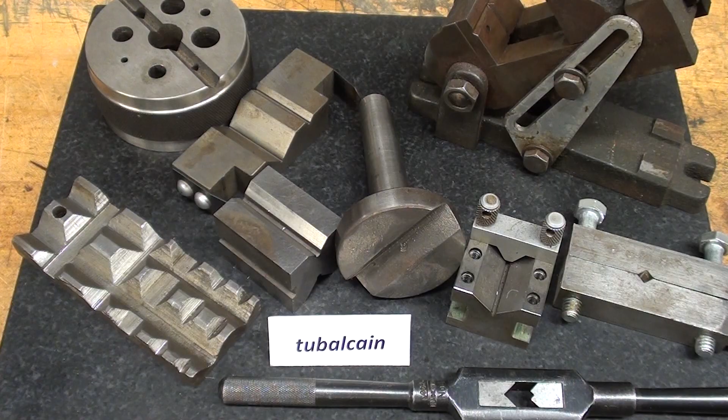Howdy, it's Tubalcain once again, and this is a two-part video dealing with how to make a 90-degree notch in your workpiece. Now, quite often you need to do this, and there are many different ways of doing it, but looking at some of the samples I have laid out here, you can see that you need to do this if you're doing repair jobs or making certain kinds of projects.

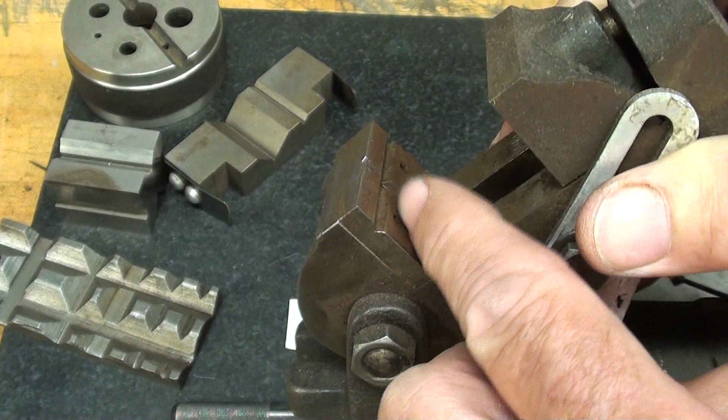So there's a 90-degree V in a tap wrench and in a lathe dog. There's all kinds of V blocks that require it. Crotch center, and you're going to see it quite often in drill press vises where they have one of the jaws with 90-degree V used to hold round stock.

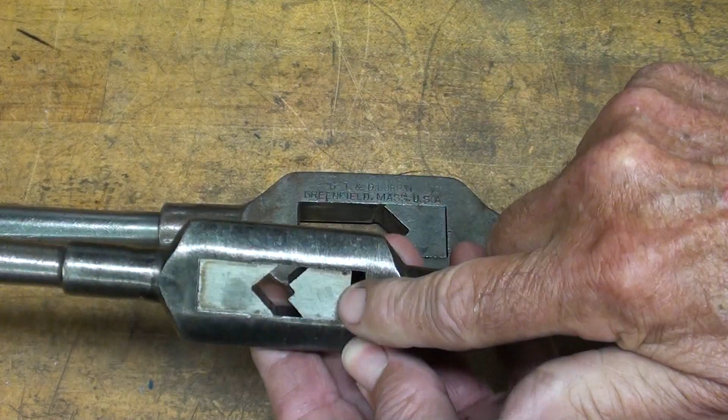What prompted me to make this video and this demonstration is that in the following video I'm going to show you how to make the movable jaw, which is missing in this Greenfield tap wrench, and another one of the models will look like this, and that's really what I'm modeling it after, and I'll be making this movable jaw out of tool steel. So be sure and watch that video, and there's several different ways of approaching that.

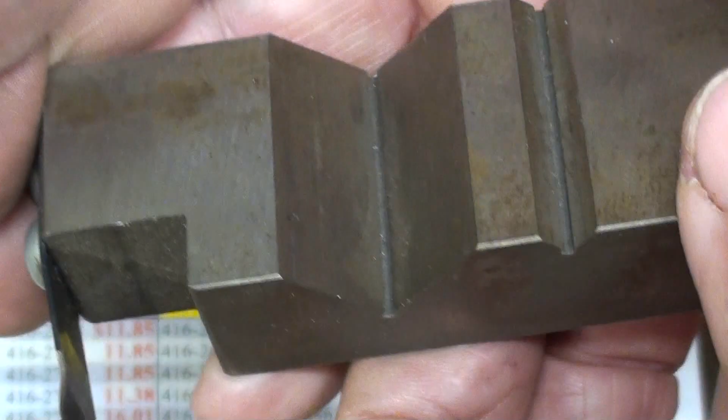This 90-degree notch is very easy to make if you have the right cutting tools. For instance, here's a drill mill, and that's easy to center. The problem is centering it within the work, so that's what I want to show you how to do. And these are available in 60-degree and 90-degree, but they're rather expensive when you get into the larger size that you might need. So a 1/2 is about $40 or $50, and when you get into a 3/4 wide, it's about $150.

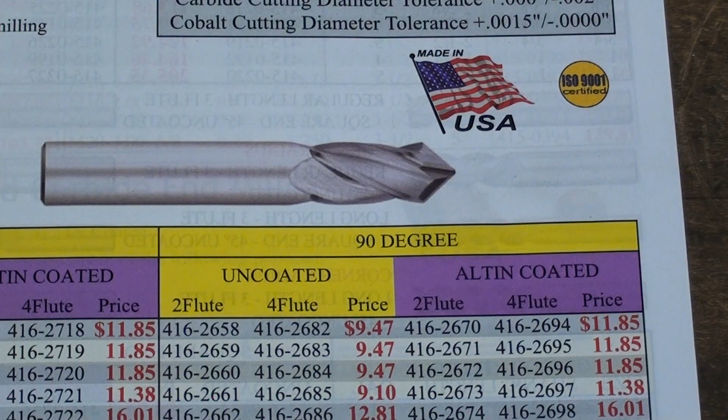And if you have a horizontal mill, you're probably going to use a double angle cutter as shown in this old Brown & Sharpe catalog, and those were available in, as you can see, different degrees here, but I'm interested in the 90, and this goes on the arbor of a horizontal milling machine, and it only costs $7. Oh, that's right, that's from 1938. That's about a $250 cutter.

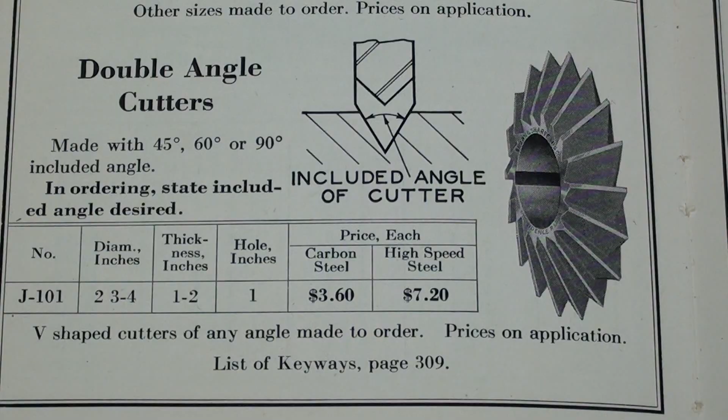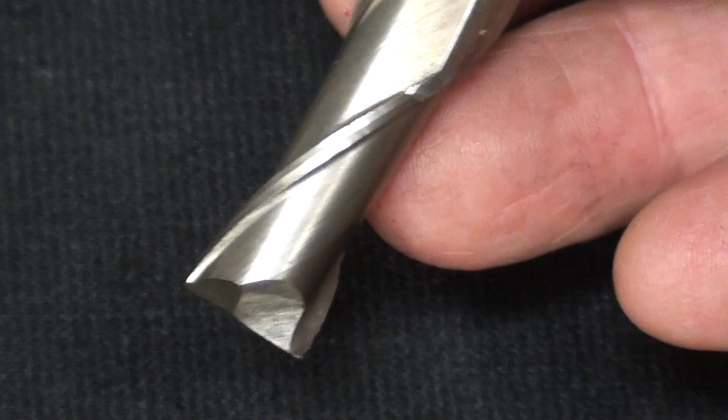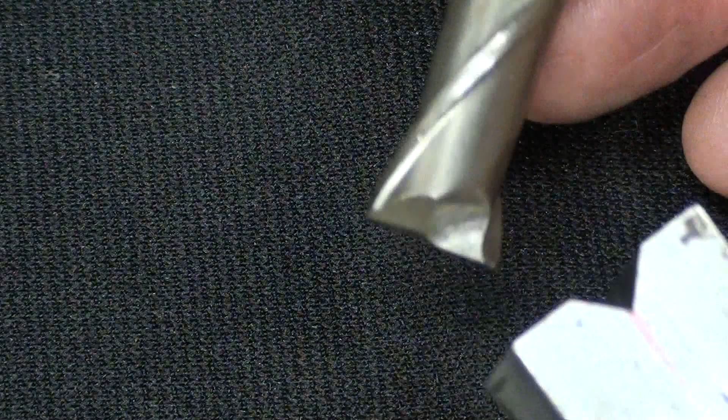But the problem we're solving here in this video is how to make that V-notch 90 degrees with an end mill, because everyone has end mills. Everyone that has a milling machine has end mills. They're cheap, easy to find, and that's what we want to use. Okay, and that's going to give you 90 degrees.

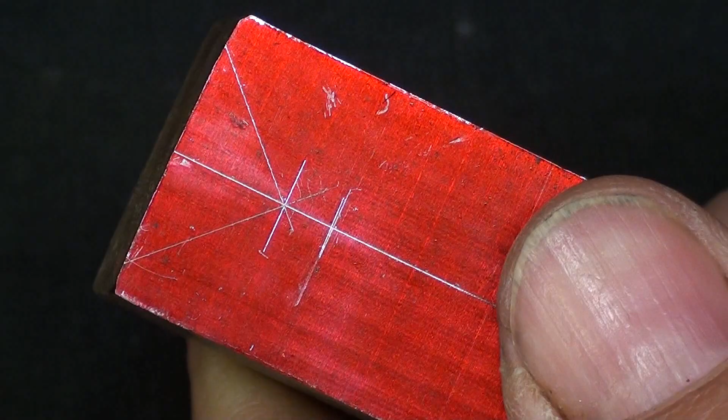Most of you have probably been doing it by the method where you just do an accurate layout and mill to the layout lines, and that probably is fairly accurate, and later on I'm going to show you how to measure that to see if you're truly on the center. Sometimes it doesn't matter if you're exactly in the middle. It just doesn't matter, but other times you want it right on spot. So let's talk about using an end mill and setting it up in the vertical mill. Let's see how to do that and to find the center.

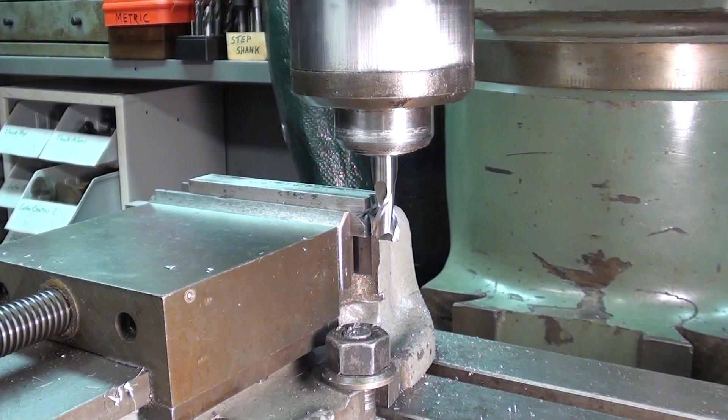Here I am over at the milling machine, and it's very important that when you're doing this method that the end of the work be perfectly square. So I'm going to mill it off square. And this could just as well be done in a 4-jaw chuck. Matter of fact, it probably would be better. Okay, I'll remove the burrs. This is 3/4 inch square cold roll steel, and it's just a sample piece.

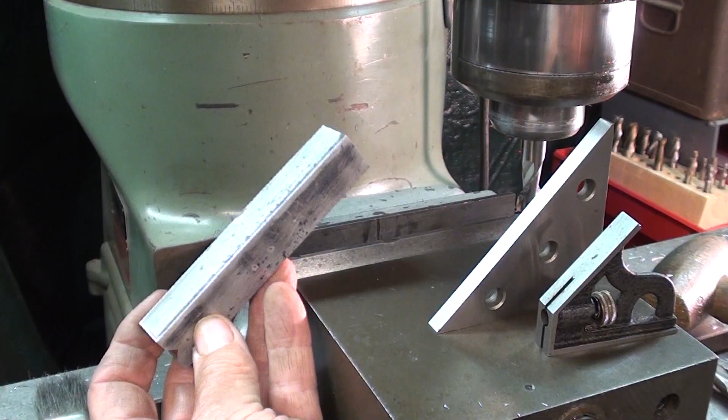Now this is how to set the work up, and this is again 3/4 inch square, and it's only 4 or 5 inches long, and you're limited to the length because we have to put the work into the vise at a 45-degree angle. If it's too long, the bottom is going to strike the table, and you don't want it to stick up too high here because you will lack rigidity.

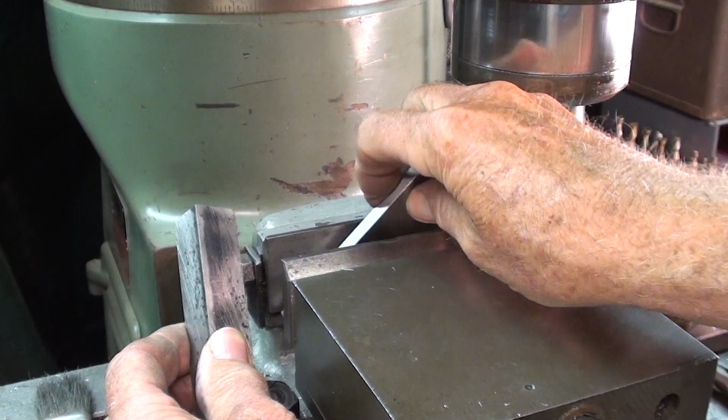So using my 45-degree machinist square, and you can certainly use a combination square or whatever you have, but this one is highly accurate. I just lay it into the vise like that, and I'm going to put just a little pressure on the work, hold it on the square, and I want a minimum amount sticking out, but that's just fine right there.

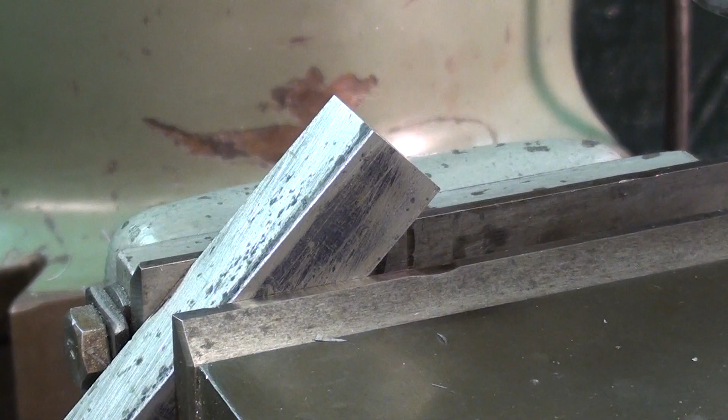I'll tighten the vise, remove the square, and now we have to do just a little bit of calculating. I'm back at the bench to show you how I'm actually going to do this and talk a little bit about the math, and don't let that scare you. We need to touch off. This is held again 45 degrees in the vise. I need to touch off right here and then move in a given amount, but I don't know what that amount is. That's an unknown.

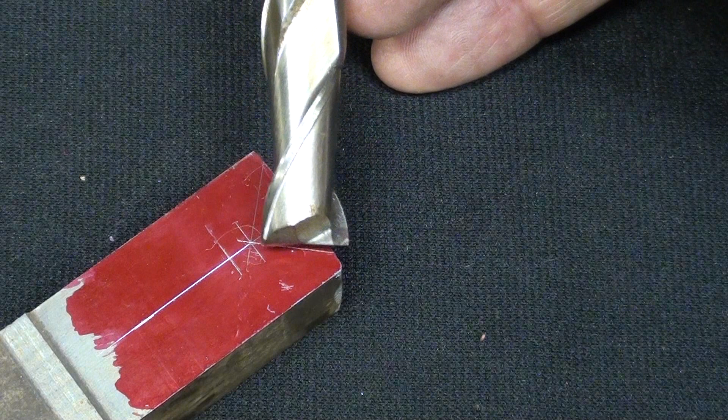Also, I will come down from the top in the z-axis and touch off. It's a matter of going in. And how do I find that? Now this is 1 inch or 7/8 square, but let's pretend that it's the 3/4 inch square for right now.

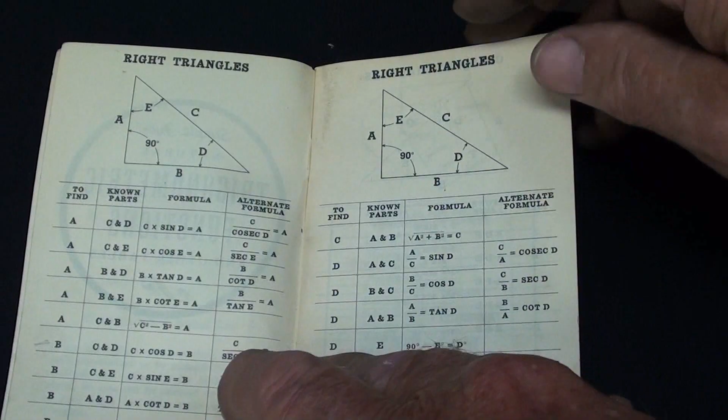Okay, down to the math of it, and I'm not a math teacher, so I hope this makes sense, but using a trig function book, and these are available everywhere, you can find this on the internet easily enough, and this little book is full of formulas and functions. Don't let that scare you. But looking on this page here, remember trigonometry is just the study of triangles. So we have some givens already.

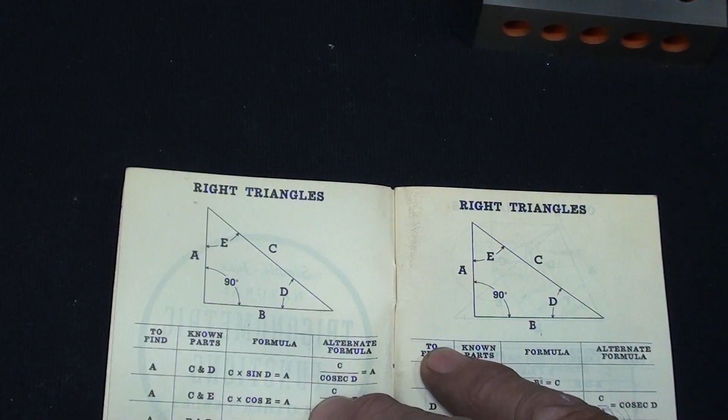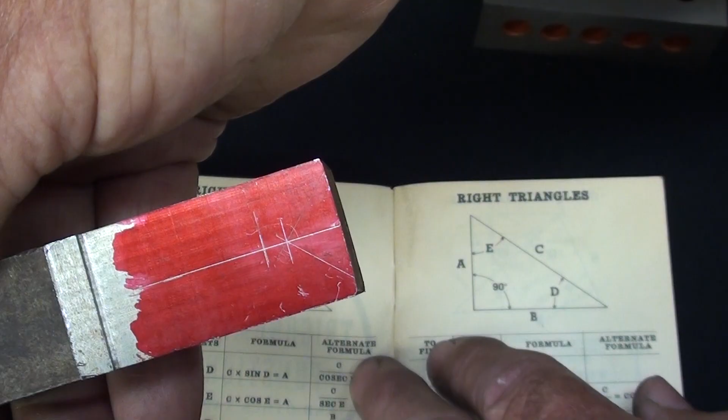We know that the angle is 45 degrees, and we know that this length here of C is 3/4 of an inch. That's 0.750 for this 3/4 inch stock. But in fact, we want to find the middle, so I'm going to change the value of C to 0.375. That's again half of the 3/4. So we have those two, and that will give us B. So we want to find B, which will be the center of the work, right where we have all the crisscrossing there. That's the point that we're trying to find on 3/4 inch stock.

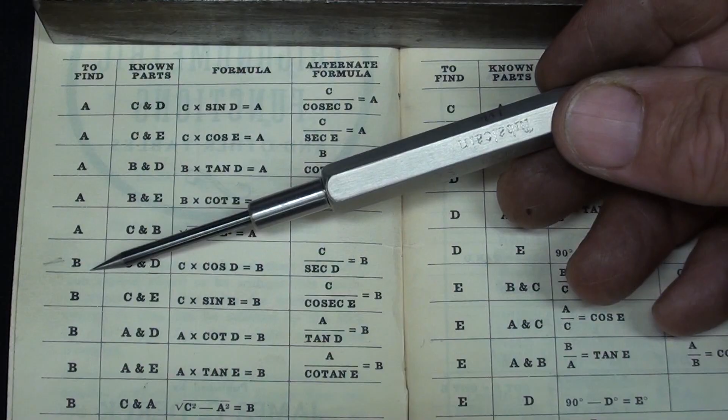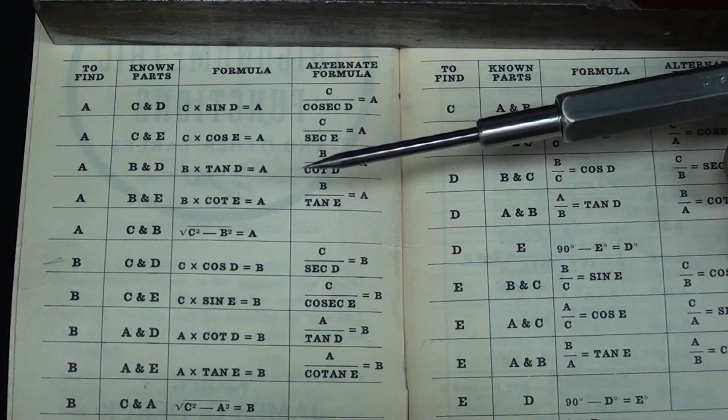All right, let's see what formula we need. Through the process of elimination, I have determined that I want this formula here with a little pencil mark on it, and that will give us the value of B. So the formula is B equals C times cosine of D. Now we already know that C is 0.375, and that we need to find the cosine of D, and that's easy enough to do. That's what I'm going to show you right now, how to find the cosine of 45 degrees. And there's two ways of doing it.

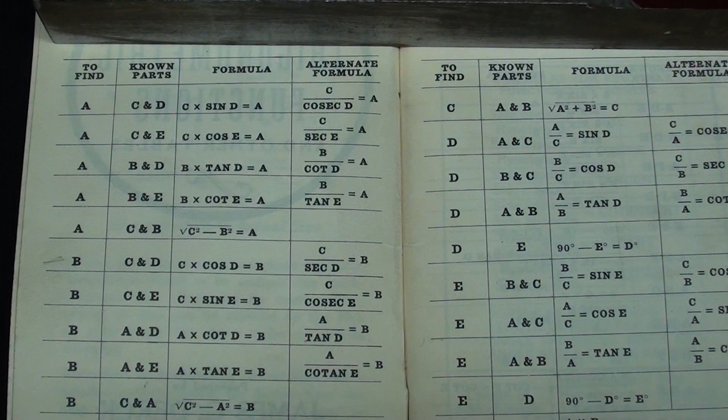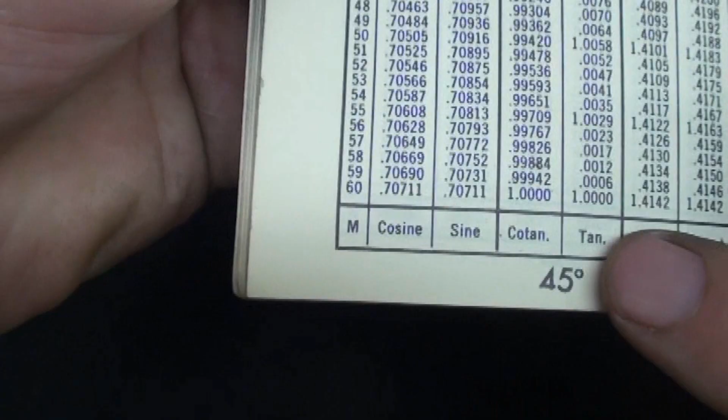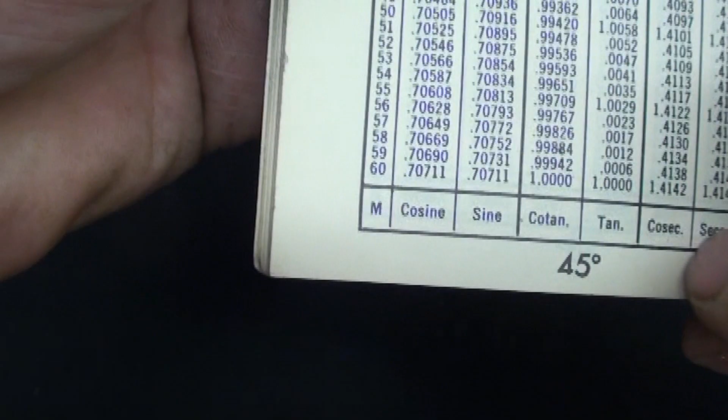If you have trig tables, and there's many pages here, we'll just go toward the back here for 45 degrees, and the cosine right there of 45 is 0.707. And the 60 there is 60 minutes, so forget that. So it's 0.707. Now I'll show you an even easier way.

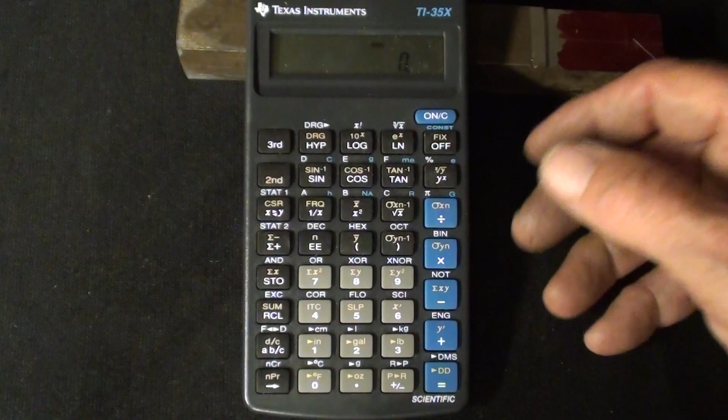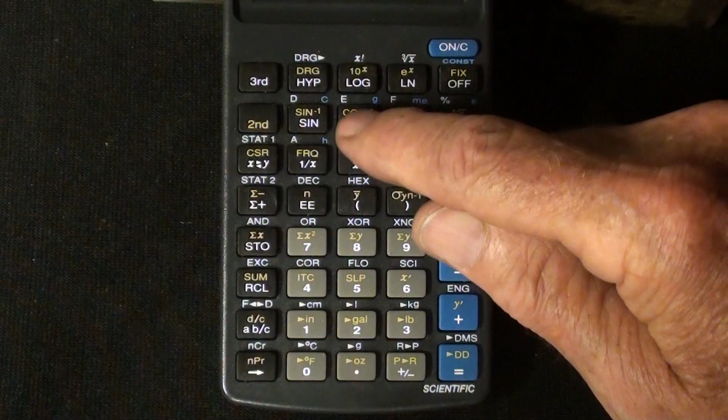Everyone in the world has a scientific calculator. They used to cost hundreds of dollars. Now you can get them at the dollar store, I think. But it's so simple. Notice that on the screen here it says degrees. You ever wondered what that degree was for? So let me just punch in 45. And then I'll just hit the cosine button right here. And that gives me that value. There it is, taken out many more places than we need, but you can see it's still 0.707. Easy enough.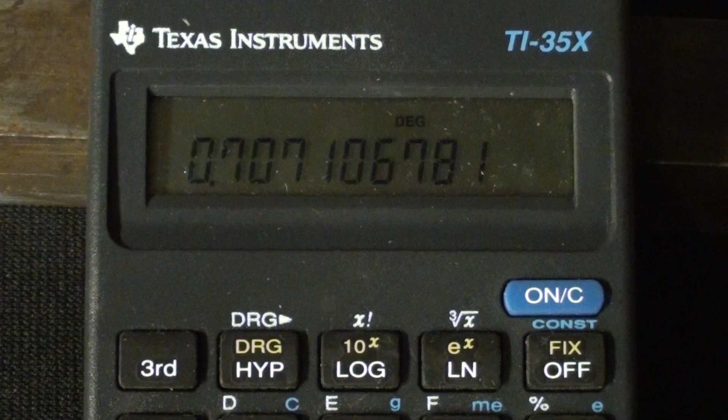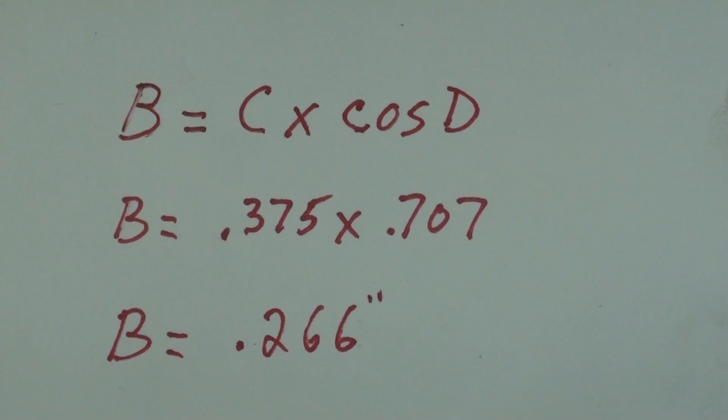Doing the very simple math now for this formula, B equals C times cosine of D, filling in the numbers there. B equals 0.375 times that 0.707 that we just found, and the result there is that B equals 0.266. So that means simply that after I touch off here and find that corner, I'm going to move in 266 thousandths, and the corner of the end mill will be on the center of the work, right out here.

Then we have to proceed to cut by feeding down and over equal amounts until we end up with the right width here, and I'm just going to cut it to approximately 3/8 of an inch. By trigonometry you can get that exact, but how often would you need the width of your V real accurate? So we're just going to do that by by-guess and by-gosh, even though I probably overdid the math there. I hope that wasn't a turn off to you people. So let's go back to the mill.

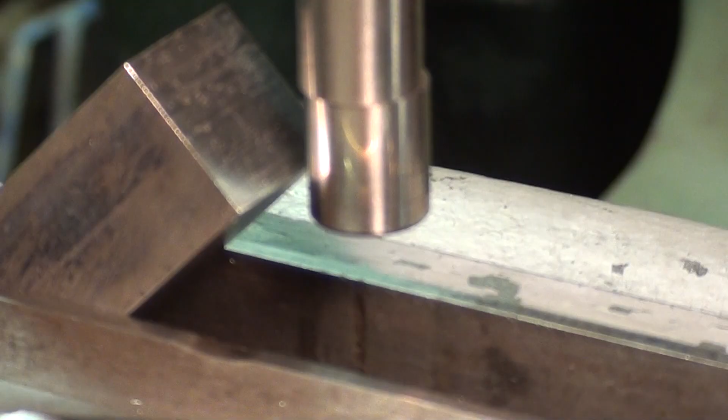Now when I said touch off, I suppose you could use an end mill for that, but I'm using an edge finder, and I use the 1/2 inch diameter edge finder. Since I am using a 1/2 inch end mill, that just makes the tool changing a little bit easier, and I don't need to change the collet.

Now, how accurate is it to use an edge finder on a corner? I actually have never done it before, nor do I know anybody that has, so a lot of what I'm doing here I'm just making up. By experience, I haven't really done something like this very often, if ever, or it was a long time ago. So let's touch off.

Alright, did you see it slide over? So now, looking at the DRO, I'm punching it in to 0 in the x-axis, and I will not be using the y-axis at all.

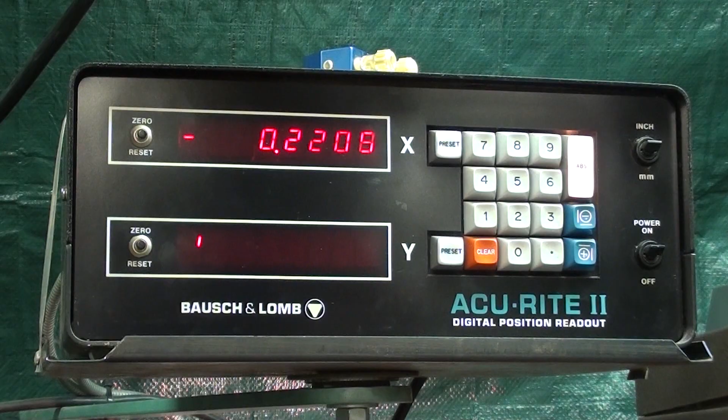By the magic of television, I have removed the edge finder, which is 500 thousandths, and I put the 1/2 inch end mill in there, so I do not need to compensate here because the cutter is on the corner of the work. Then raising that up and looking at this again, I'm moving over the 266 that we talked about. Right there, and if you don't have a DRO, you can dial it in.

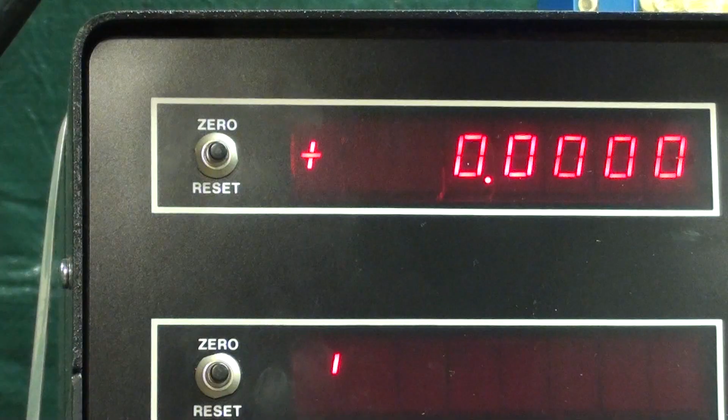There we go. Do you understand now that the end mill is right in the center of the work? All of that math was for that purpose. And since I'm now in the center of the work, I'm going to zero this out. And I can always come back to that when I need to.

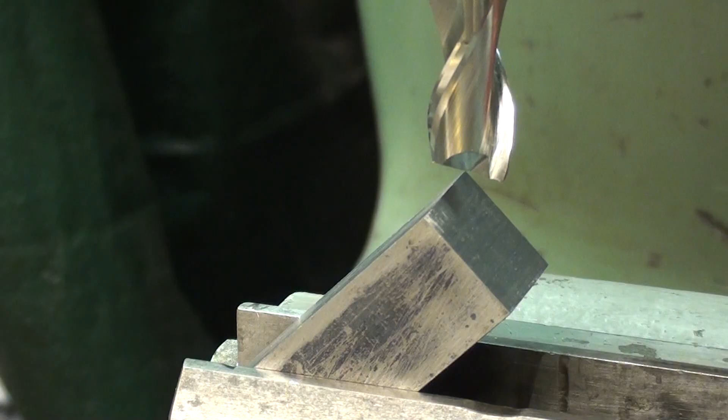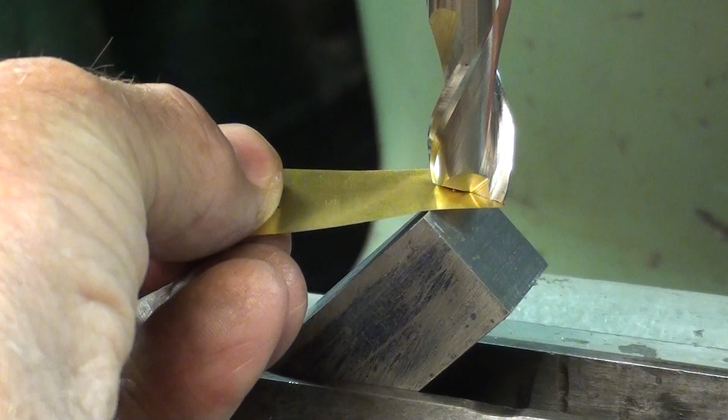And the next step now is to raise the cutter out of the way, bring it up over the top corner, come down and touch off, and I'm going to use a piece of 1 thousandth thick shim stock just to get my feel there. Okay, so I've touched off right here, and let me show you what to do next.

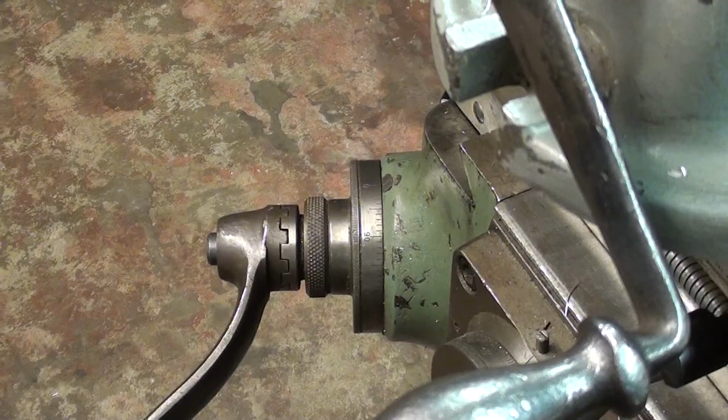I need to back the cutter away from the work like that, and looking down at the knee now, I'm going to raise it. This is the z-axis, 266 thousandths. So there's 100, 200, and 66 thousandths now. So now I've positioned it, and the corner of the end mill is exactly on the center of the work. But I can't cut yet. I've just got it zeroed out in both the Z and the X axis.

So now I want to arbitrarily and capriciously take a 50 thousandths cut. So in order to do that, I am going to raise the knee 50 thousandths. You can't see that, that's off camera. So I raise the work 50 thousandths, and I'm also feeding in 50 thousandths. I'm looking at the DRO, and then I will lock the table in both of those axes. I'm ready to cut, finally. And that can be done so much faster than what this video is.

And I'm going to do this without oil so it doesn't interfere with your view. You understand why I moved the 50 thousandths in both directions? And there's my V-notch, and that didn't take off a whole lot of metal, so I'm going to take off another 50. So I'll increase the feed in both axes again. And this is another 50 thousandths.

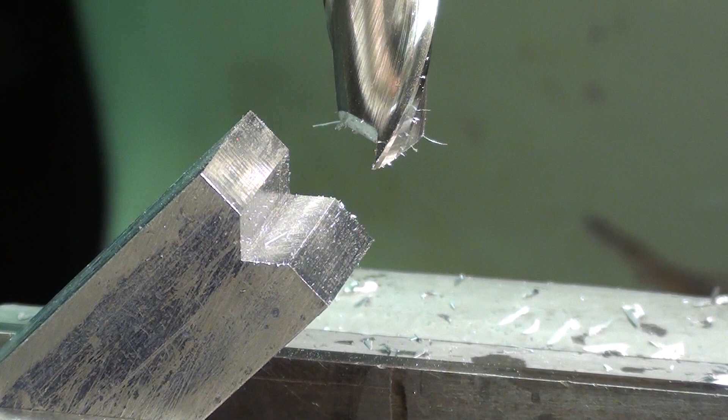Now, using the stubby little ruler, I'm getting a measurement of about 1/4 inch. So I'm going to take off another 50 thousandths, and that should take me to around 3/8. All right, and that's a total of 150 thousandths in each axis for the final cut here. And that gives me a groove that is about 3/8 wide, and that's what I wanted.

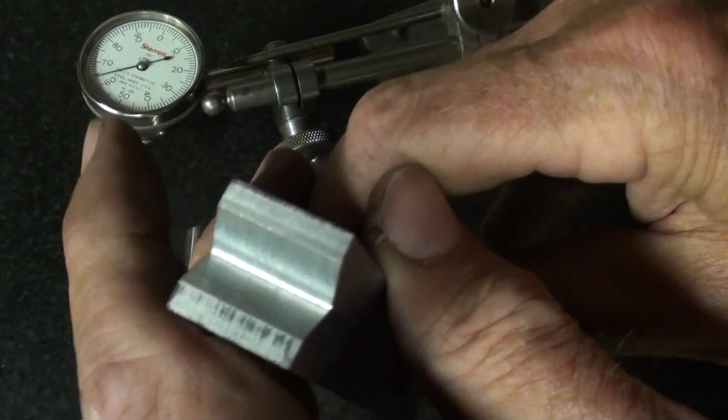If you need it more accurate than that, that also can be done using trigonometry. I'm not going to show that. Now let's go measure it. Alright, I'm back at the bench. That's what it looks like, and again, just a little over 3/8.

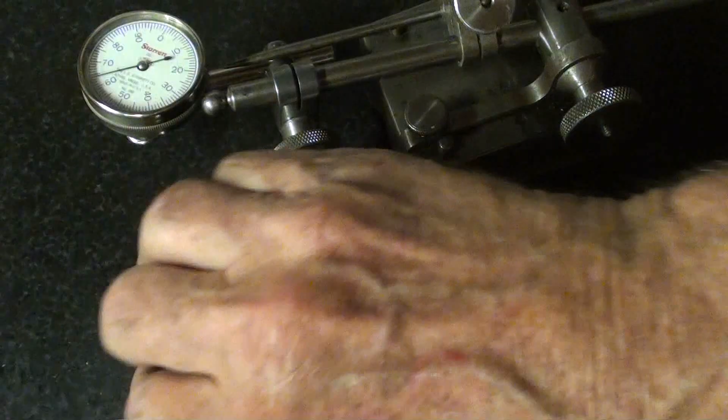I've deburred it thoroughly with a file. It has to lay flat, and then I've cleaned the surface plate thoroughly. This is a 3/8 dowel pin, and that's not too critical. And I've already set the Starrett indicator on my surface gauge.

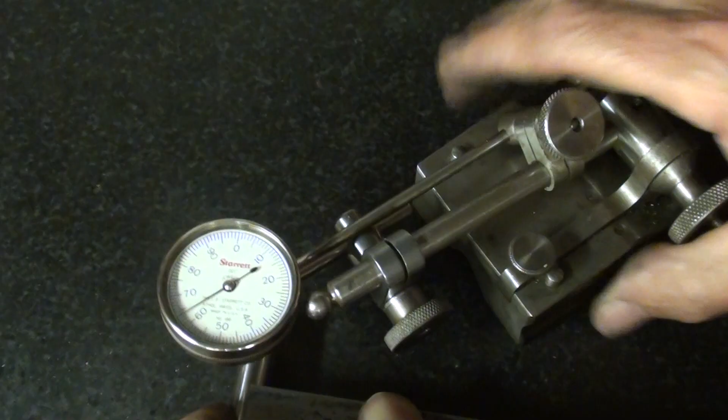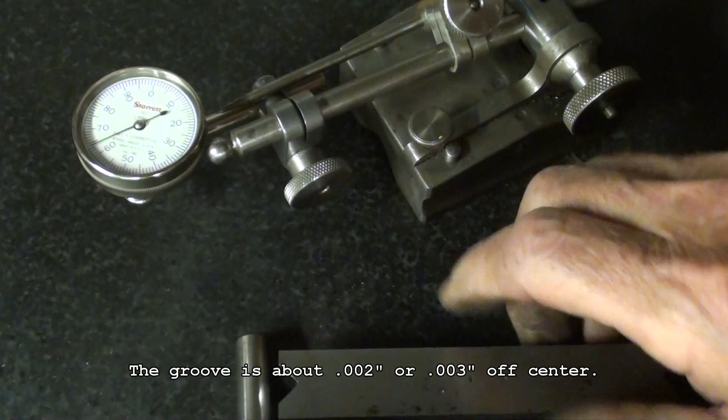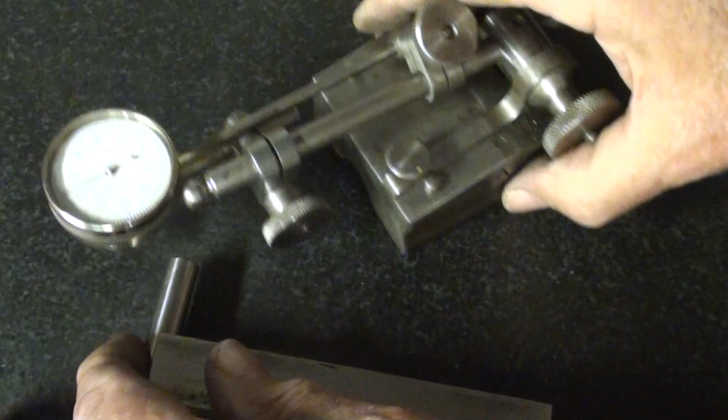It's about 1/1000th over on that side, and on this side also more or less the same. I have to be careful to push this very tightly in there. So the reason I'm doing this is just to show you that that V-groove is in the center of the work, more or less. And that's the tricky, hard part.

So in the next video I'm going to put that to practical use when I make this jaw for the tap wrench. But that concludes this video, but stay with me for another 5 minutes or so as I show you how to do it.

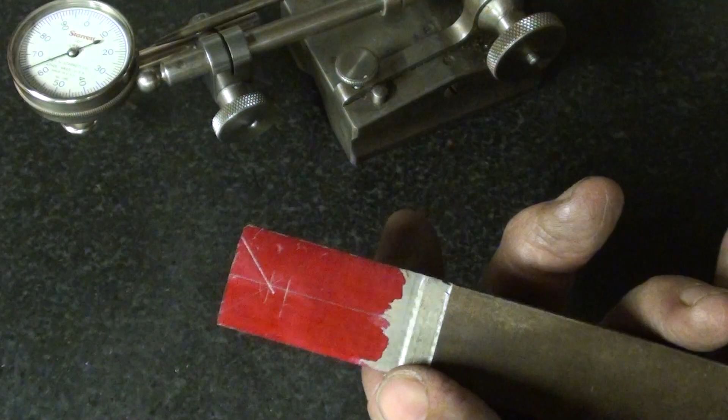I'm just going to mill this to the line. This is the one that I laid out earlier, to see how accurate it is. This is optional, so turn this off if you're sick of it, but I will use this method here just to see how accurately I can mill it by the layout method, because I know there's going to be some people that just do not want to get into this trigonometry. So either goodbye right now, or I'll see you in a minute.

Alright, I'm over at the mill now. This is the 7/8 square stock, and I'm just going to mill it down to the lines and see how close I can get it centered. I'm just going to mill away willy-nilly here until I get close to the lines, then I'll get a little more serious about it. I have a little more sticking out of the vise than I want because the work is so long.

I've got it roughed away fairly close to the line, so what I'm going to do next is just mill down to the line. That is, I'm working now in the Z-axis only, and I'll worry about the other axis when I get down to the layout line. I would like to mill the line in half, but that's not going to happen. Alright, I'm down to the line now, this way. Now I'm taking it in the X-axis to the line.

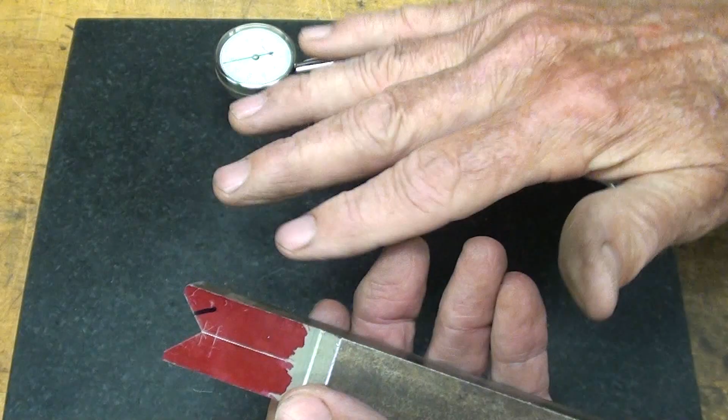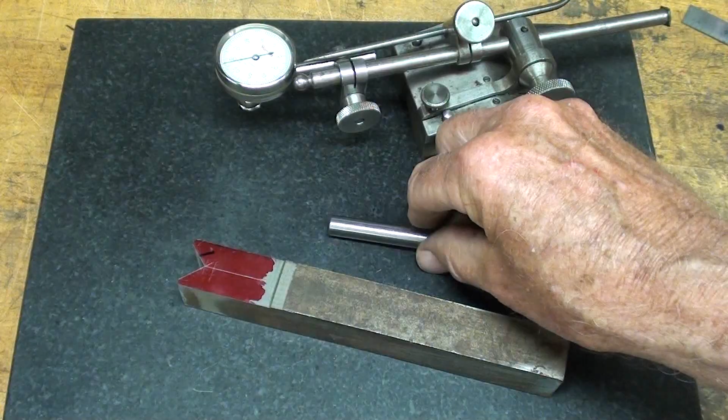Okay, there it is. And I have to tell you, I already measured it, and I am absolutely shocked by the results. Absolutely shocked. I'll keep you in suspense for just a minute more, because this was done so quickly. The whole thing, including the layout, could have been done in 8 or 10 minutes. So let me turn the light out here so that the indicator will show up a little better, and I'll use the same 3/8 dowel pin.

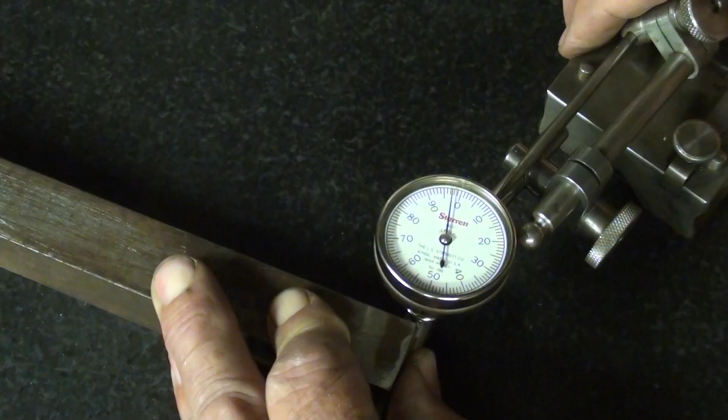If I were a betting man, I would say that I would be lucky to get it within 10 thousandths. So the indicator's already set here so that I'm getting... I got to zoom in on that just a little bit. It's about 0 there. And it's within 2 thousandths. That's really about how close the other one was.

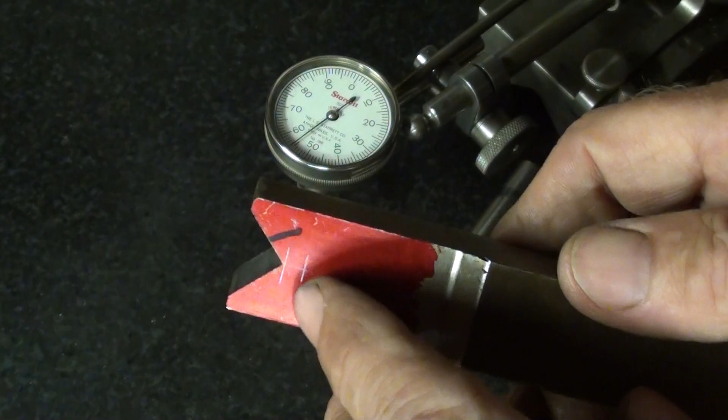With all of that work, all that math, all of that touching off, and I basically got it as accurate as that with the layout. You could knock me over with a feather. I hope you stuck with me. Well, you did stick with me. I wonder how many people didn't get to see this. Because this is still, let's face it, the way that most people are going to do it, to avoid the math and to speed things up. So that's how to make a 90-degree V-groove by 2 different methods.

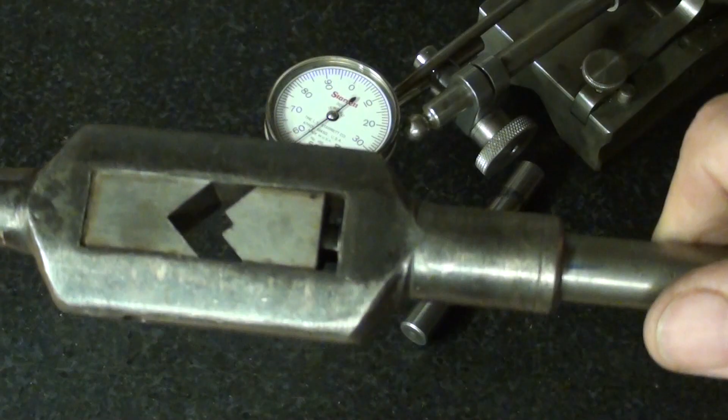Now stay with me in the next video as I do the jaw for the tap wrench, because there's a few other operations there too. I'm going to deal with a left-hand thread and a hardened piece of tool steel and all of that.